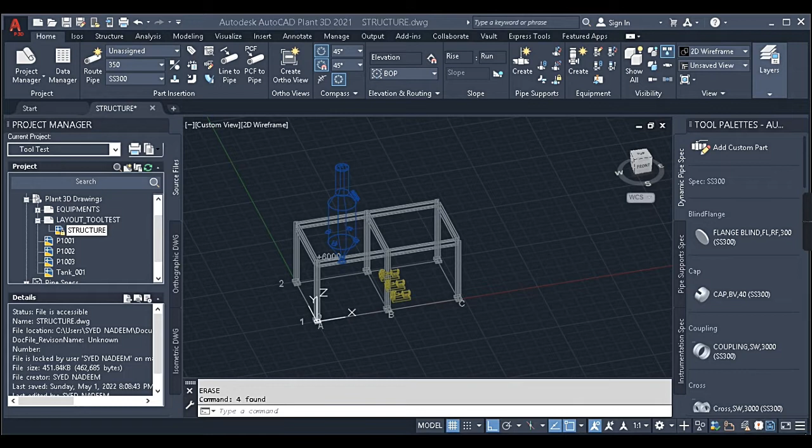This is the second part of our plant tutorial, and this tutorial is about clearing your tool test. If you haven't watched the first part of our plant tutorial, please complete the first part and then you can join the second part. So let's get this video started.

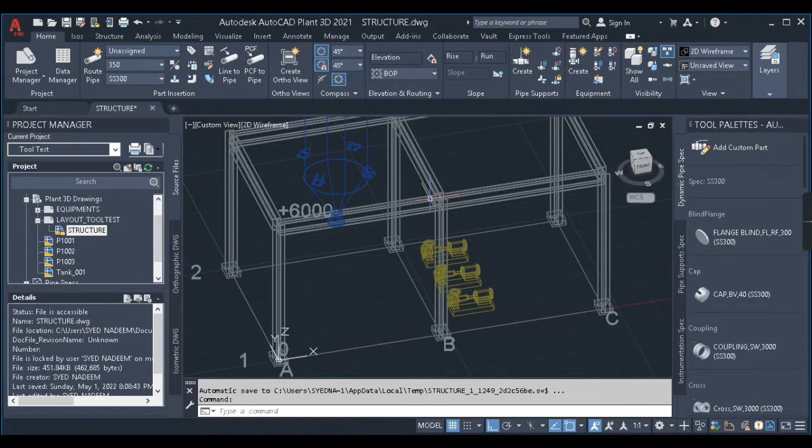So guys, this is the model which we had created in our first part. Here we have the equipment, the three pumps and the structure. We have to do the pipe routing for these three pumps which is getting connected to this suction line. We will be just modeling the suction line and not the outlet, as this is just an overview of our Plant 3D tutorial. In future videos we'll be getting into details of the pipe routing.

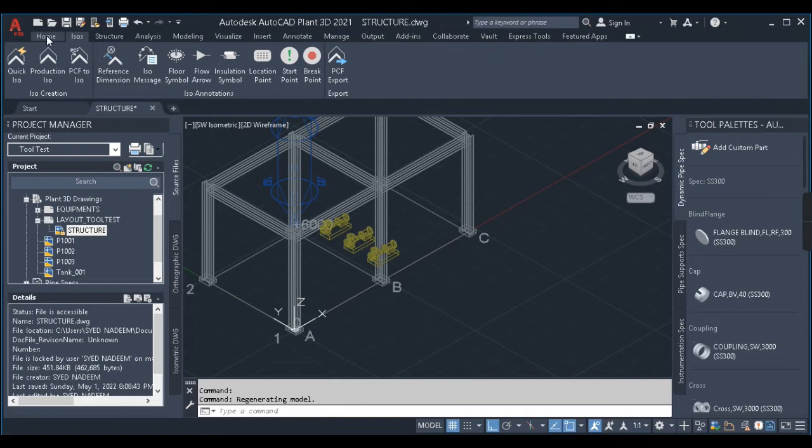So first, to route the pipe, we have to go into Home, and we have options like pipe route. For pipe routing we deal only with this section, and this section is for equipment modeling, pipe support, etc. Next we'll be doing the isometric extraction, for which you have to go into the isos. So first let us get started with the pipe routing.

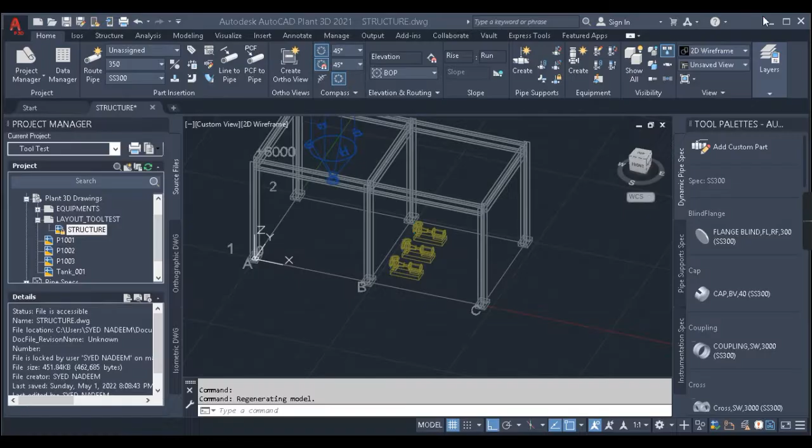I'll start with the suction of the pump. We have a 12-inch line here, and the pump suction nozzle is 10-inch. It started from the center of the pump, and as you can see, it is 10-inch. First I have to select the spec. As we don't have any specific spec specified for a project, I'll be selecting any random spec from here. I'll select this CS150. You can select any other spec, and if you're dealing with some company, they will have their own spec.

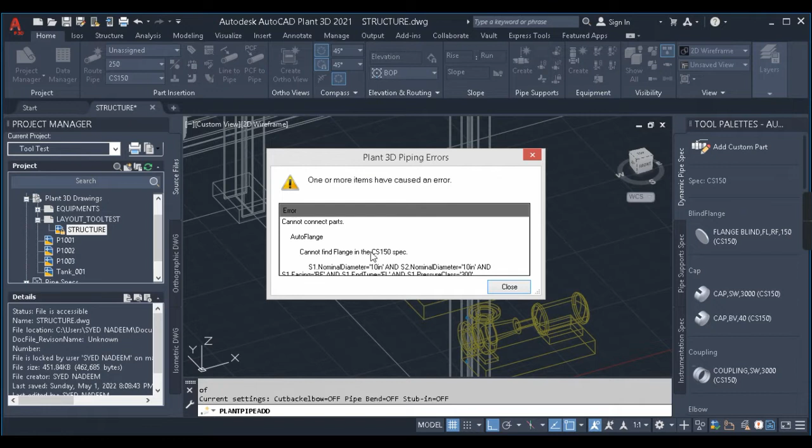So first it is 10-inch. 10-inch is 250, and I'll route the line. Route line, select nozzle. As you can see here, we are getting a message that it can't find the flange. So we don't have a flange of size 10-inch in this spec. So I'll change the spec to maybe SS150. Let me check with this.

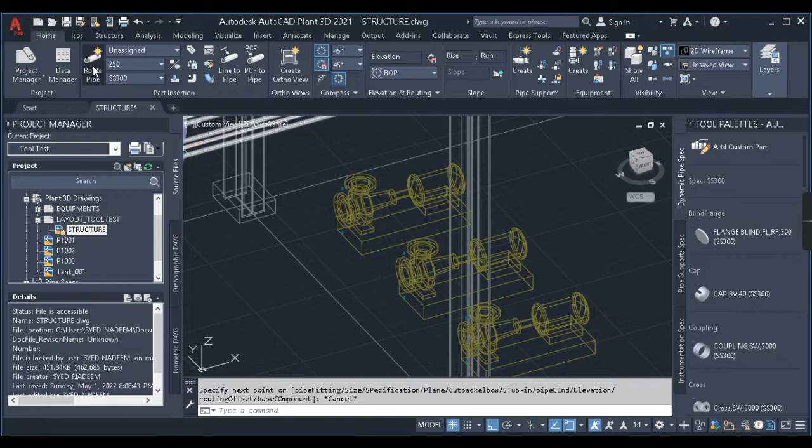So again, route line, nozzle. Okay, we don't have it in this as well. Let me just check this. Okay, the flange rating is 300. So 300 rating, nozzle. Yeah, now the flange is created.

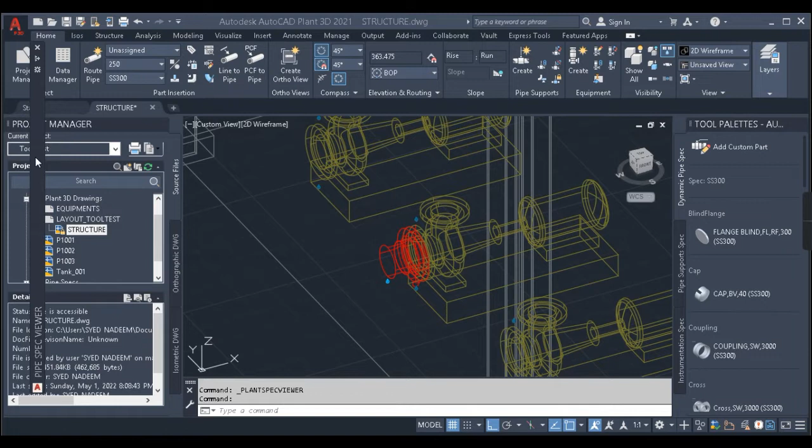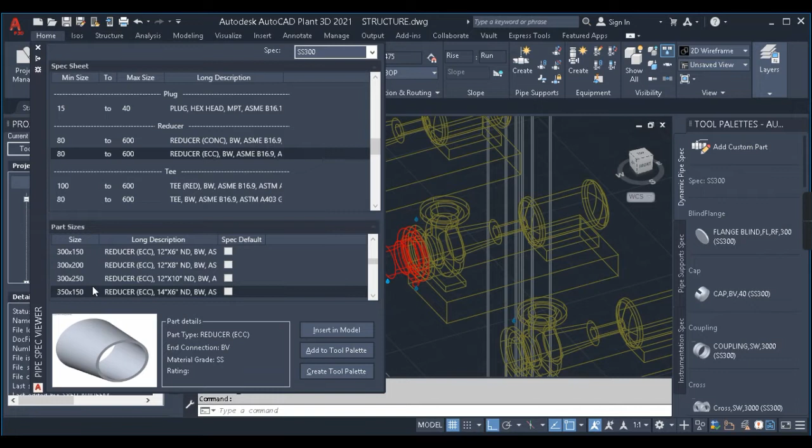250 by 300. I'll double click and it will come here, and I place it like this, and the flat side comes on the top side. Let me check. Yes, perfect. We'll route the line, and let's just give another 300.

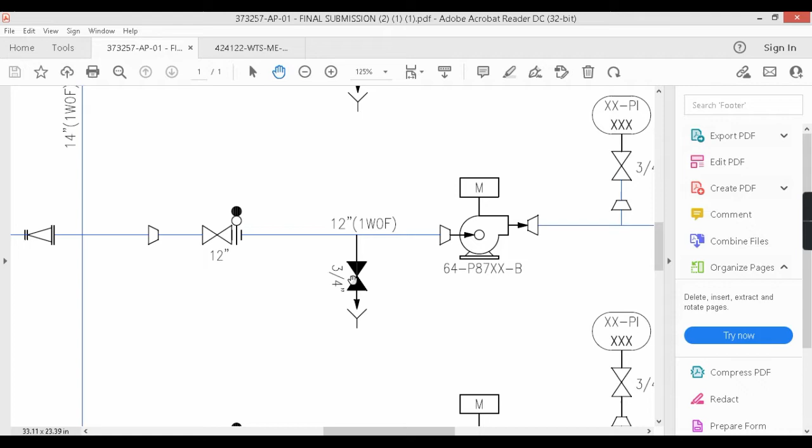Our next component which is coming is the drain. Let me just increase it to 500, and this length I have made as 500. In the center I'll be putting the drain. The drain size is 3/4 inch with a gate valve. So 3/4 inch is 20. I'll route from the center. I'll take around 500.

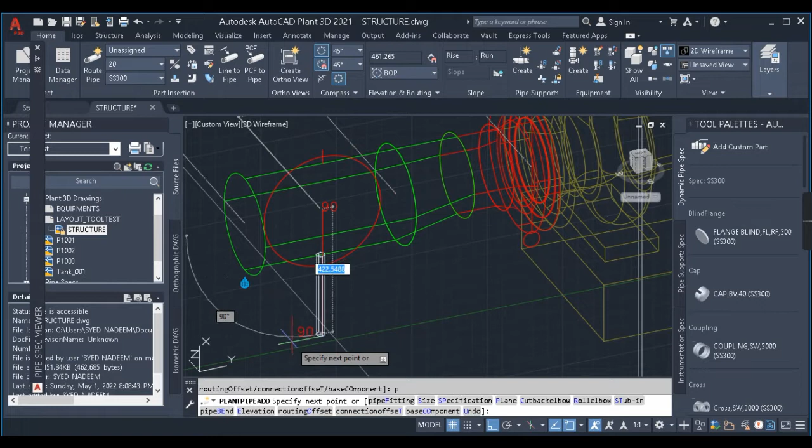Sorry, it has taken the vertical direction. To change the plane we have to press P and enter, so it will change the plane. I'll take 500. 500 looks too big, so let me just take around 350. Now I have to change the plane, so I press P. Another 200.

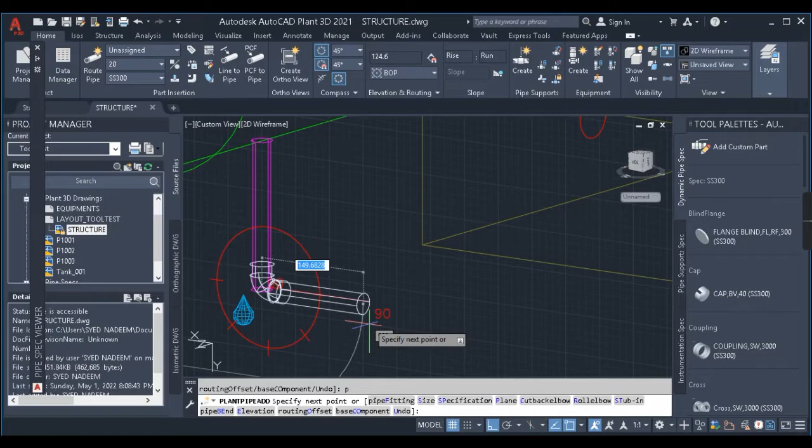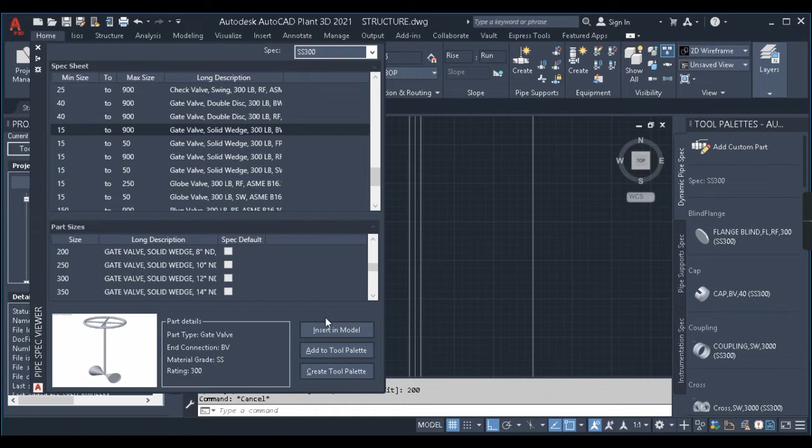Let me check in the top view. Okay, I have to increase this by 200. So I have a gate valve now. I'll just take this butt weld gate valve, insert in the model, and node, enter.

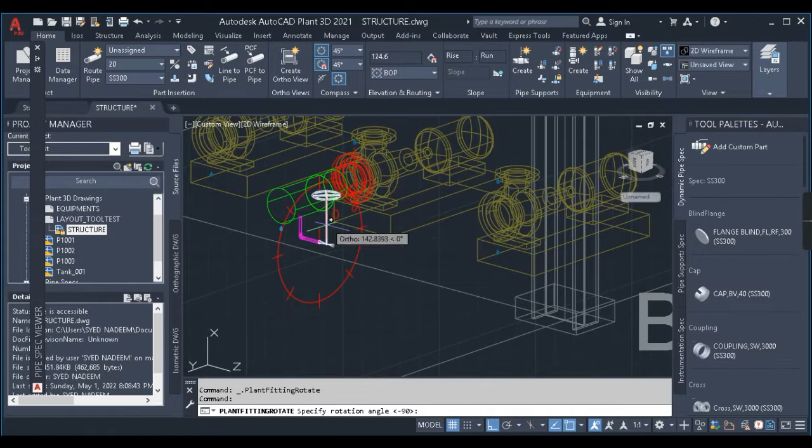Okay, and I have to rotate this valve by 90 degrees. So I have to click this valve, and we have a circular dot here, so that if you press it we get the rotate option. So you can select whichever direction you want the hand wheel to be.

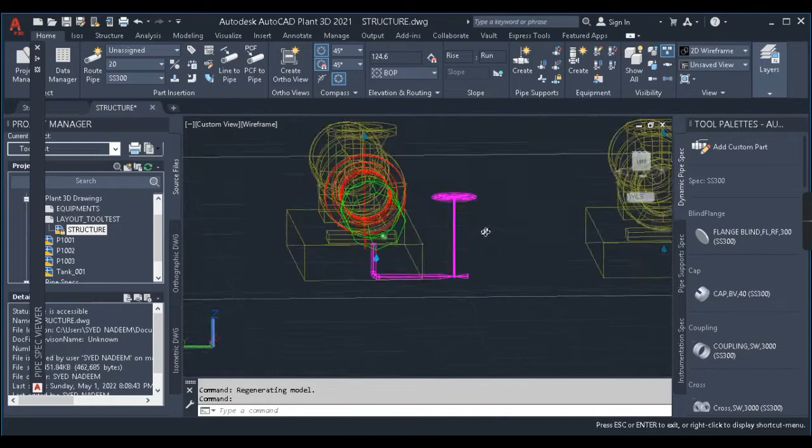Okay, and I have to move this valve by another 200. So I'll click this valve, press the center dot, I'll press 150. I think 150 is enough. Yes. So here we have our drain ready. So let me just route another 50 and change the plane by another 50. Yes. So this is our drain, and our drain is ready.

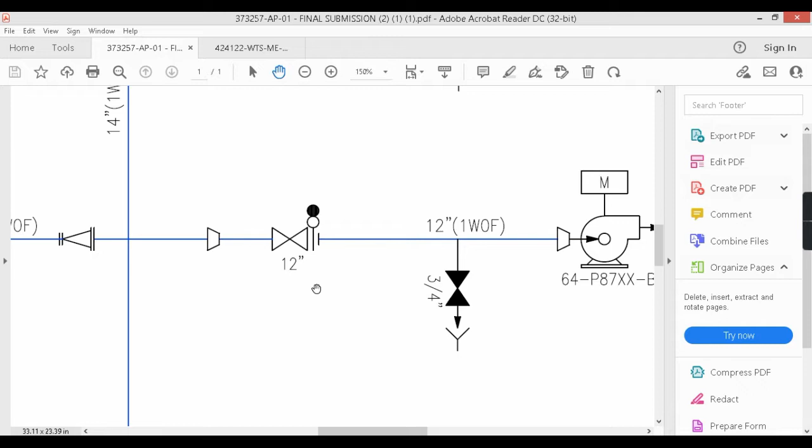So the next component we have in our line is a gate valve and a spectacle blind. I think we don't have a spectacle blind in our spec, so I'll just put a gate valve of size 12. Let me just select a gate valve from our spec, gate valve of size 12. I'll take this butt weld 300, insert in model.

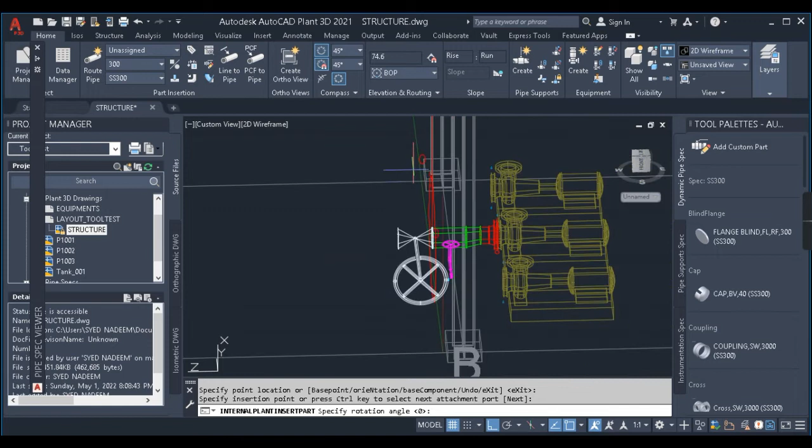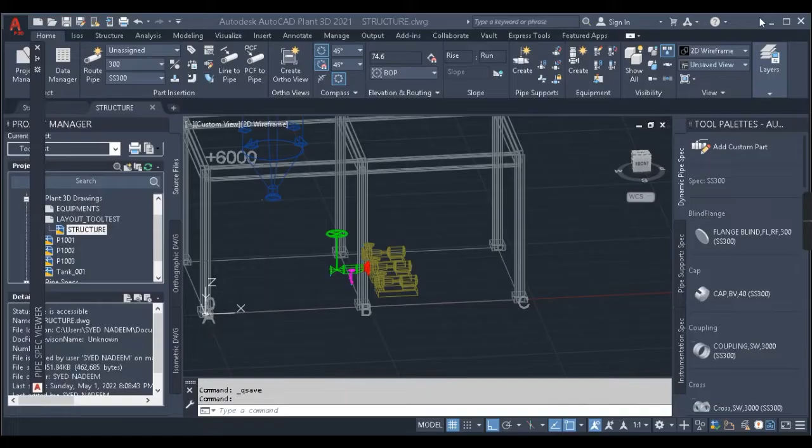So I'll just click here and select the direction in which I want the hand wheel. So here in this case I want it in the top direction. Yes, it's perfect. So save it. And the next component which we have is a reducer of size 12 by 14, and this is a concentric reducer. So I'll just put a spool of size 250, 1D here, and then we'll put the reducer.

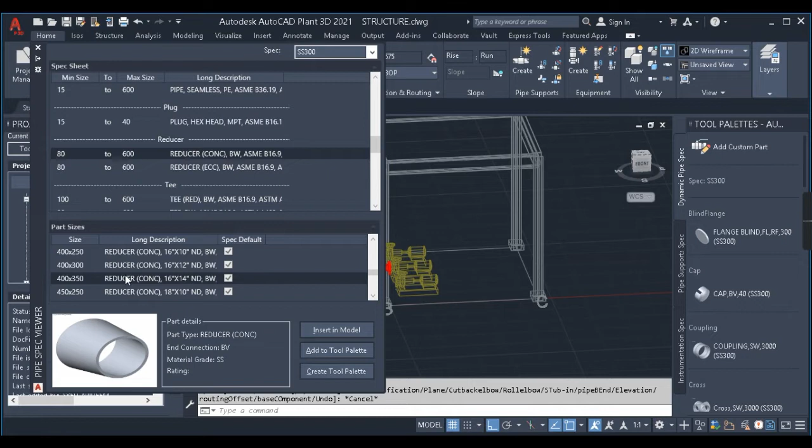Reducer is of size 300 by 350. So let me get into this reducer, a concentric 300 by 350. Okay, here we have the concentric reducer, insert in model. No, yes, and enter, and we have placed the reducer. Save it. And next the component which we have is an inline strainer.

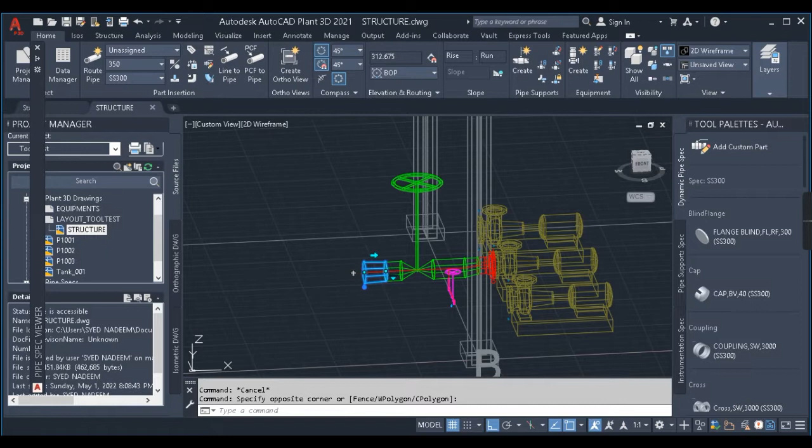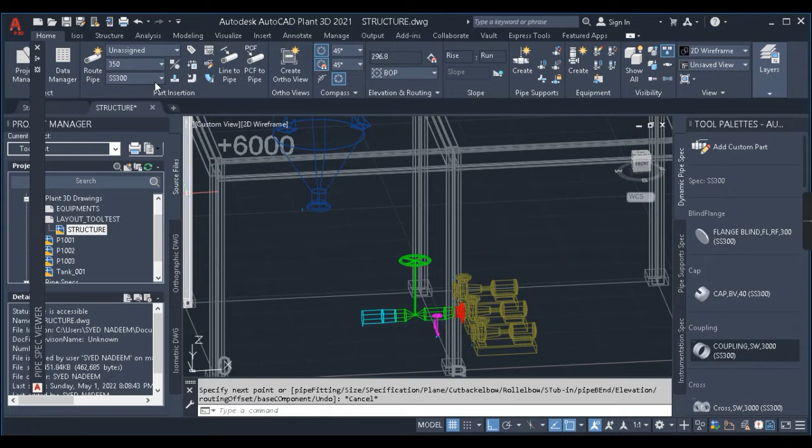And inline strainer, since we don't have it in our spec, I'll just place 2 flanges in this space. So I'll put around 1D of this, or maybe 250. Yes, I'll just place 2 flanges, so we will consider that as an inline strainer. 2 flanges of size 350. Else we can just pick the flanges from here. Weld neck flanges we'll place. Okay, we'll consider this as an inline strainer.

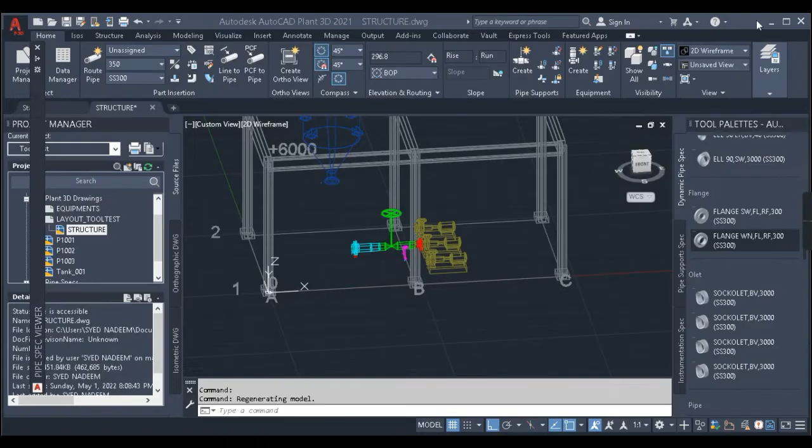Since we don't have many things in our standard spec here, we are just using it. But when you go to a company, you will definitely have all those components, so you have to place the respective components in that space. Okay, after the inline strainer, we have this 14-inch valve, which is connecting to the tank. So let me first route the pipe from the tank. We'll just directly connect to this node. We'll accept it.

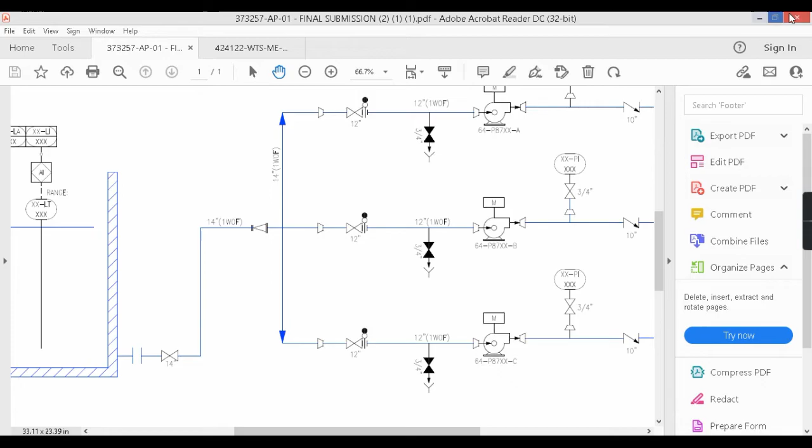Okay, and we'll place this valve here on this vertical line. So what type of valve is it? It is a gate valve of 14-inch size. So gate valve, we'll take this size 350, insert in model, and we'll just select a point somewhere in the line. As you can see, this valve's handles are very big, so it's okay for now.

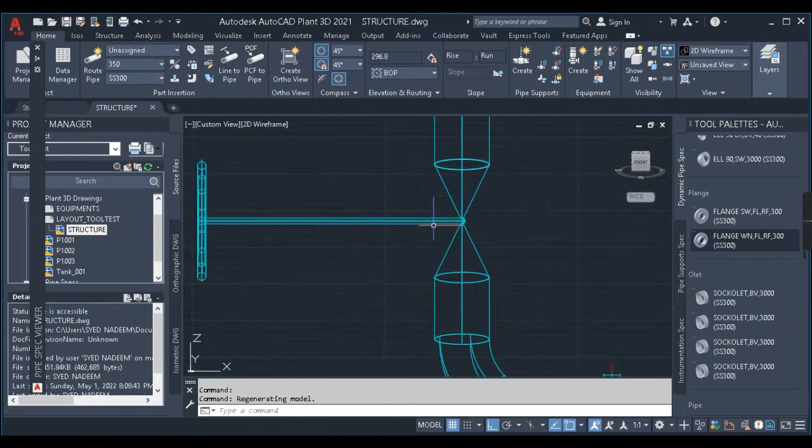So guys, as you can see, we have finished routing our main line. As you can see in this P&ID, we have the center main line connecting to the middle pump, and we have two other lines branching, and the same set of line gets copied to the other two pumps. So I'll skip these two lines. You can do it in your system if you want; you just have to place one tee and copy the same line to the other two pumps. So I'll be skipping that part.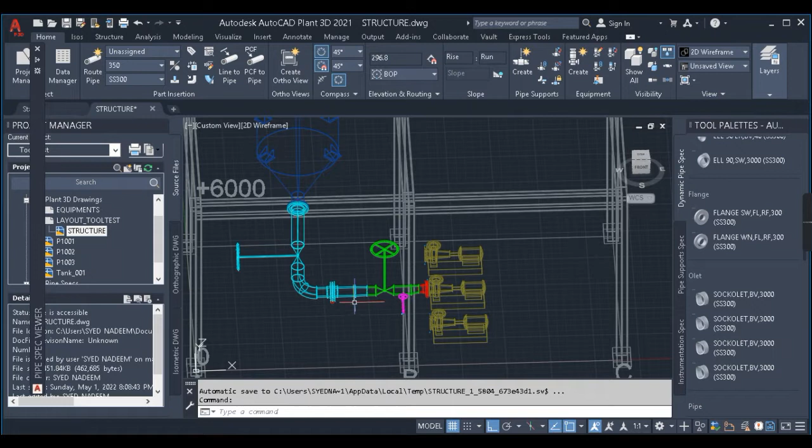So what I'll do now is we'll start with the isometric extraction. And before starting the isometric extraction, we have to give a line number to this line. For giving the line number, we have two methods. Either you can give the line number before routing the line, or you can just select this line. I'll click any component here, right click, add to selection. I'll select all connected parts, so the whole line gets selected.

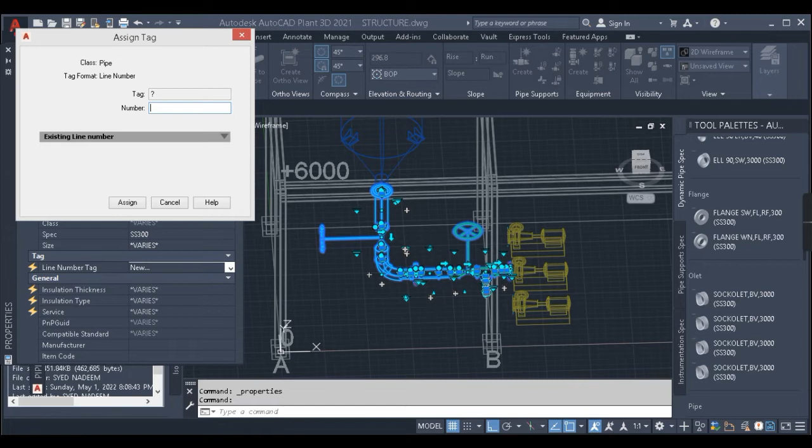So I'll open the properties and line number, and you can see here the line tag number. I'll expand this and press new. If I press new, I'll get the line tag. I'll just give L001 and assign, and as you can see, if I select any component, the line number shows up.

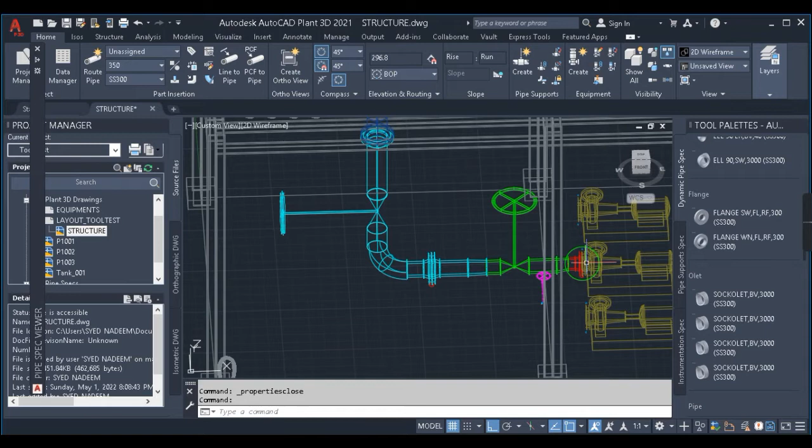So we have assigned the line number here. In the second method, you have to go here and click route new line. You have to give the line number and then start routing, and the line will automatically take the same line number. Okay guys, so let us now start with our isometric extraction.

So for the isometric extraction, first you have to click on this tab named isos. Here, if you click isos, you can see all the functions which are required for the isometric extraction. So here we have quick ISO, production ISO, which we'll be using, and we have breakpoint, start point, location point, insulation, and flow arrows.

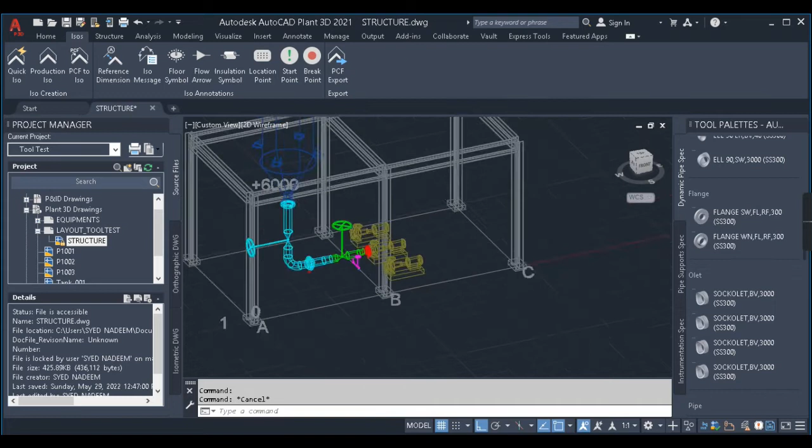So start point is used when you want to indicate that you want the ISO to start from some specific point. For example, I want the start point to be this discharge of this nozzle, so I'll press start point and select the end of the nozzle. So I have placed the start point here. So this is my start point. And next, breakpoint.

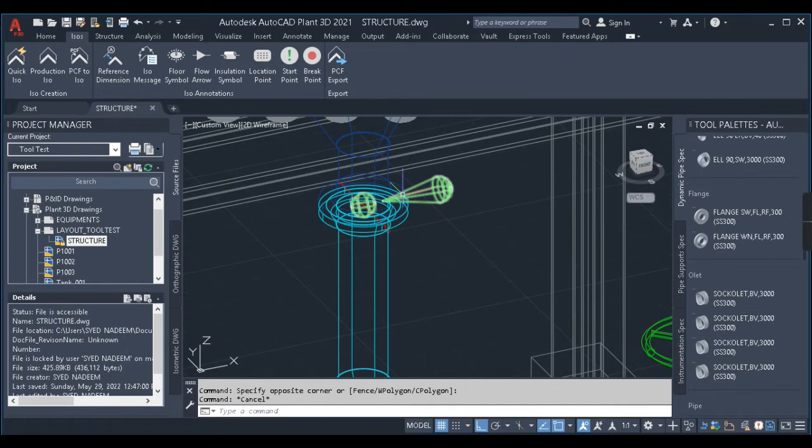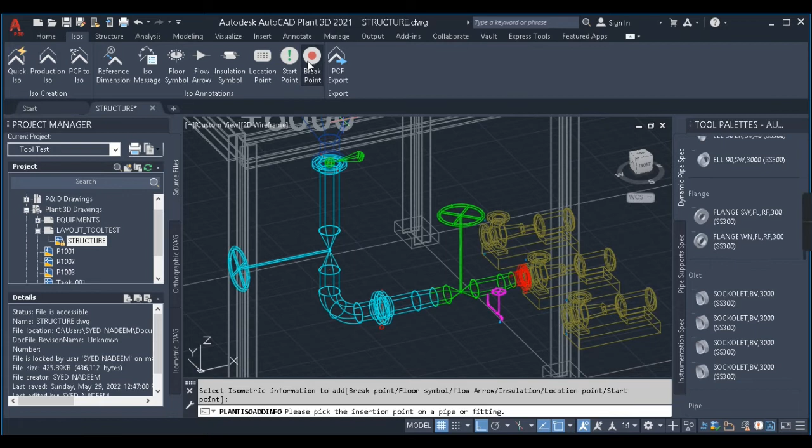Breakpoint is used when you want to break this full line into two spools. For example, I want this spool from this discharge nozzle till this end of the elbow in one sheet, and the rest of the spool in the other sheet. So what I'll do is I'll select this breakpoint and select the point where I want to break the spool. So this will be my breakpoint. Right now I don't want a breakpoint.

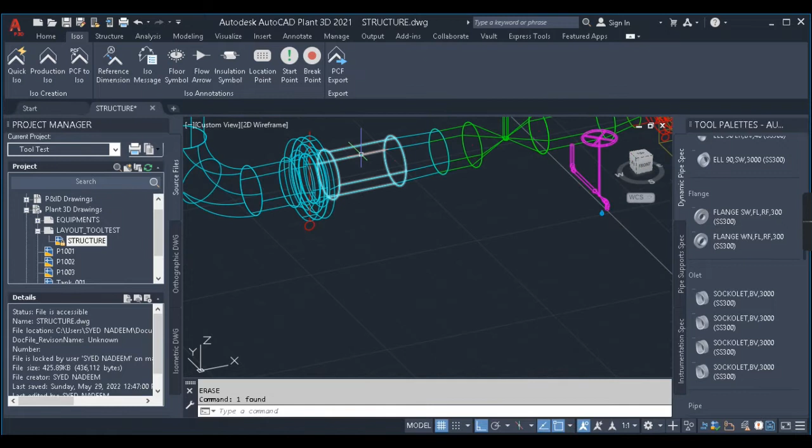Next, location point. Location point is used when you want to indicate the location of some point. Just select the location point and click the point where you want the location to show up in your isometric. Next, insulation symbol. If the line is insulated, you can show this insulation symbol.

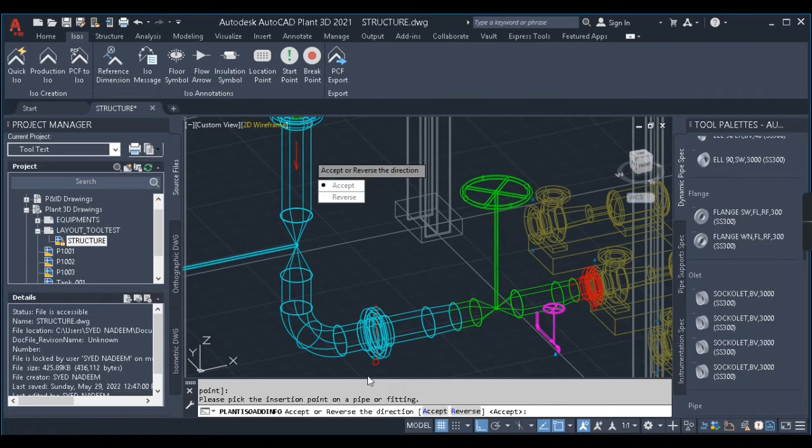Next, flow arrow. Flow arrow is to indicate the flow direction in the isometric sheet. Our flow is from the discharge of the nozzle to the suction of the pump. What I did is I selected this flow arrow and clicked on the line. It is asking to accept or reverse. Reverse will reverse the direction. I don't want that, so this direction is okay for me.

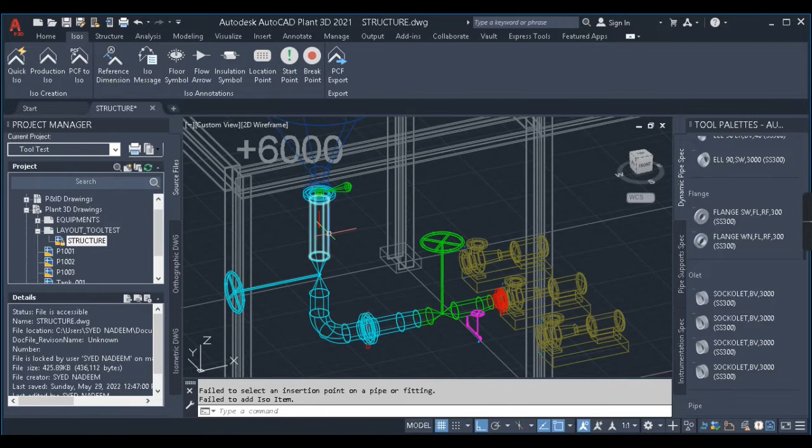Next, floor symbol. Floor symbol is used if a line is crossing the floor. In my case, it is not crossing the floor. If the line is crossing a floor, you just place a symbol on that floor level on that line. ISO message: if you have a specific message that has to be read on the ISO for that specific line, you can use this, type your message here and select where you want to display the message on the line.

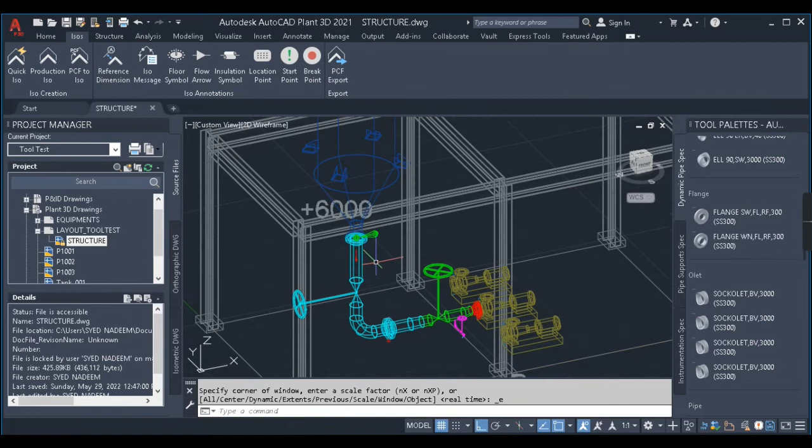Next, let us extract our ISO. First we'll do a production ISO. I'll click this production ISO, and if I have hundreds of lines, all the numbers are displayed here. As I have only one line, this L001 is displayed. I'll click this line, or whichever line number I want to extract the ISO for.

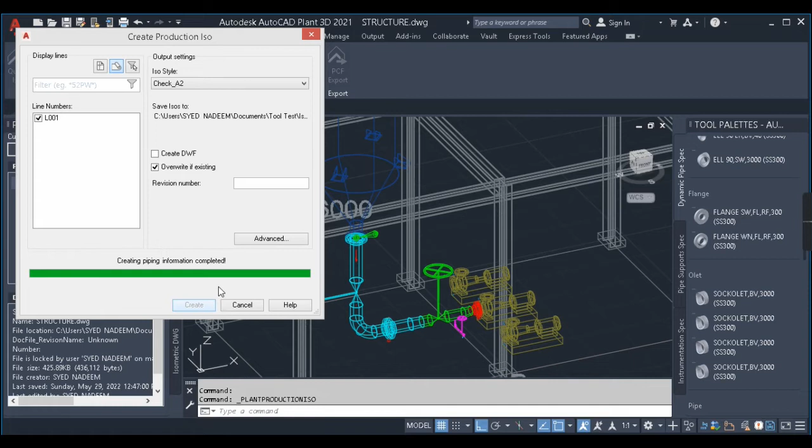I'll click this line and I won't change anything, except I'll check here as well to overwrite if existing. And this is the ISO style. You don't have to check anything apart from this. Just click the line, overwrite existing, and create. It will take some time depending upon the speed of your system to generate the ISOs.

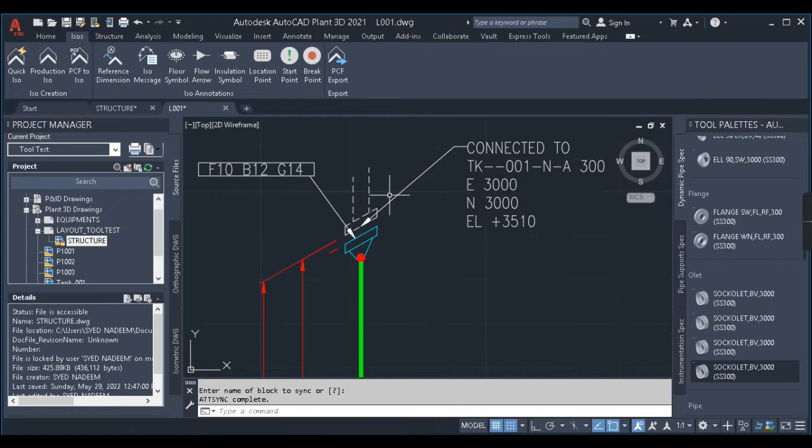As you can see, my ISO is ready. I'll click this message here, and we have the ISO location displayed. I'll click on this, and we can see the ISO is ready. This is the discharge nozzle of the tank connected to tank 001, and the line you can see. And this is the end section, and our isometric is ready. So this is how we extract the production ISO.

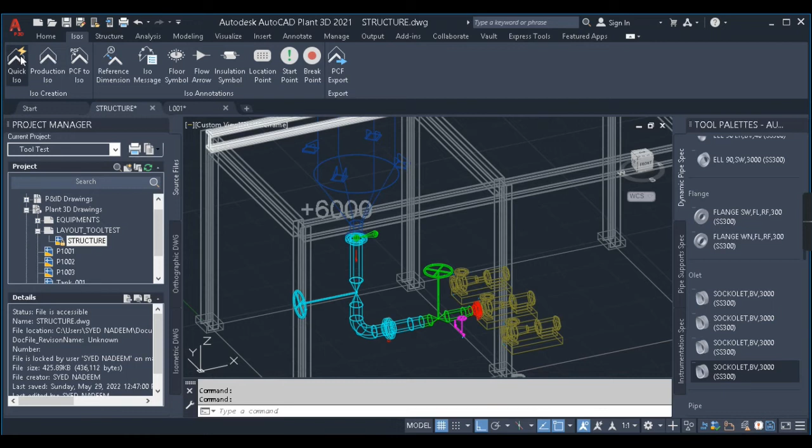Next we'll check the quick ISO. For example, I have routed this pipe and I want a quick review of that ISO. I'll click the quick ISO and select the parts which I want the ISO to be displayed for. For example, I want only till this end, so I'll press enter, check overwrite if existing and create. As you can see, my isometric is ready.

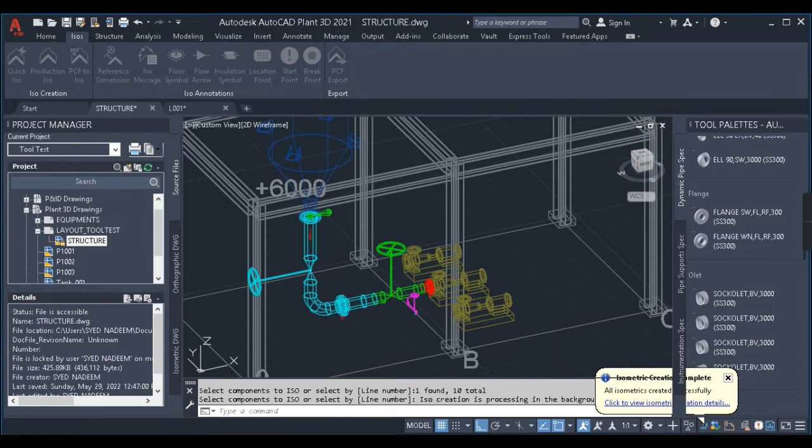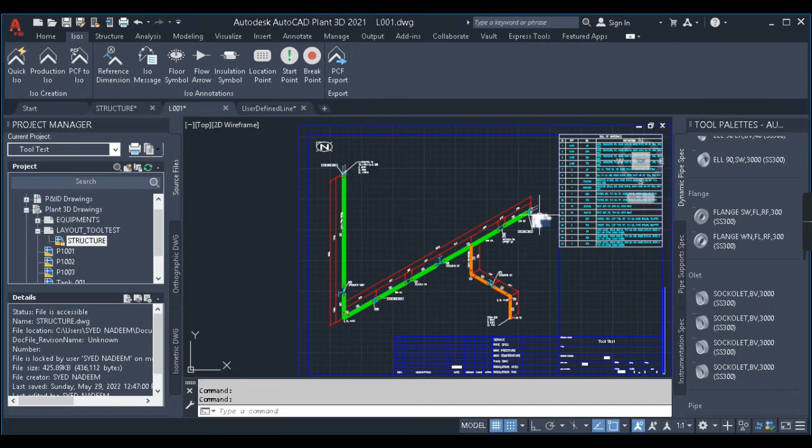I'll click this and done. As you can see, it has created the ISO of the selected part, from discharge till the end of the elbow. This isometric is just for reviewing purposes. So production ISO is used for manufacturing the spools, and quick ISO is just for reviewing. So this was all about the isometric extraction.

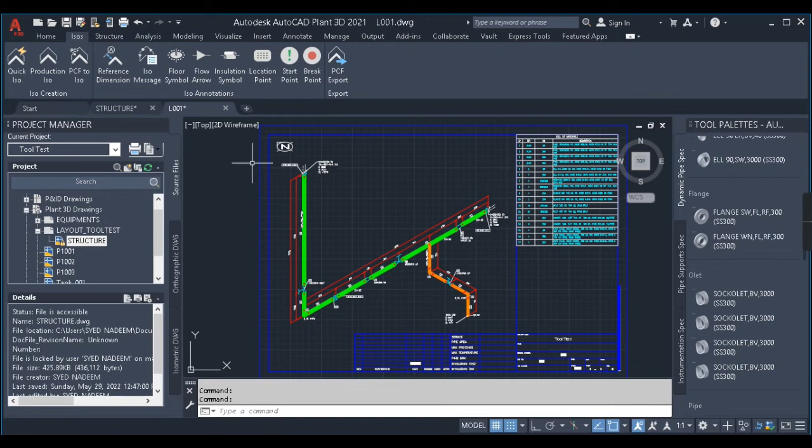Now let us have a brief look at the piping GA, creating the orthographic views of our piping system. Let us start the final part of this video, the piping GA extraction, that is the ortho views extraction. First we create a file. For creating the orthographic views, go here, click on the orthographic drawing tab, and here you have the orthographic drawings.

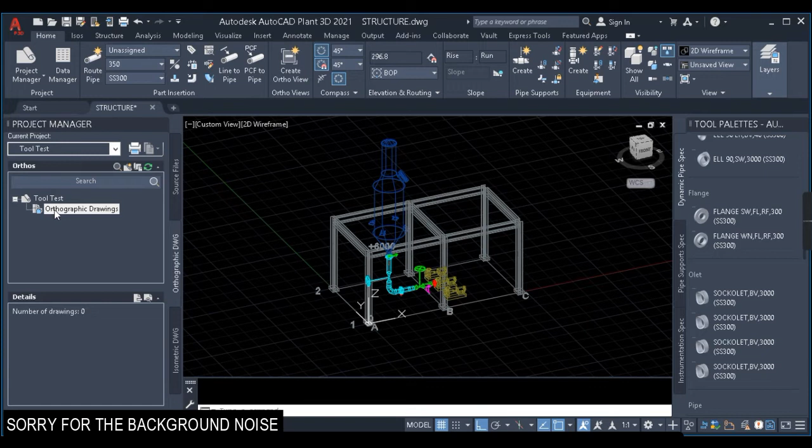Here just create a new file. I create tool test ortho. My file is created with the standard template. To create the orthographic views, we have some new commands in the ribbon bar now. I'll click on new view and select the file where I have done my piping, that is the structure. I'll click OK.

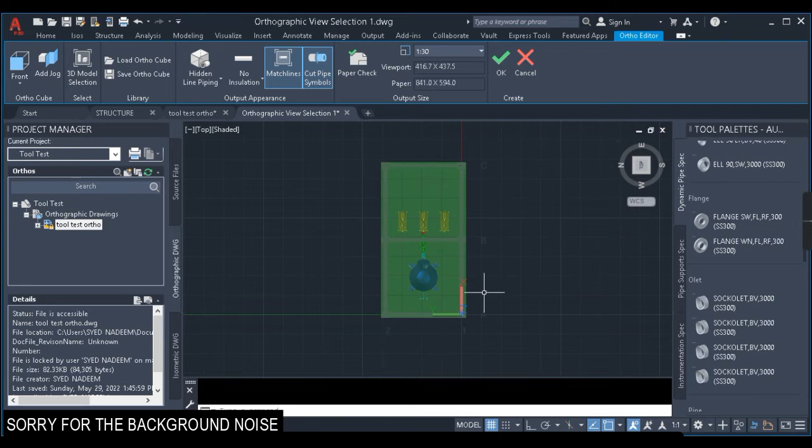And you can see we have a green box on our piping system. So whatever is present in this green box will be covered in our orthographic views. As you can see here on the top left side, we have front, top view, whichever view you want. For example, if I click on top view, the red color of the green box will go on the top. And if I want the front view and click on the front view, you can see the red part comes on the front side.

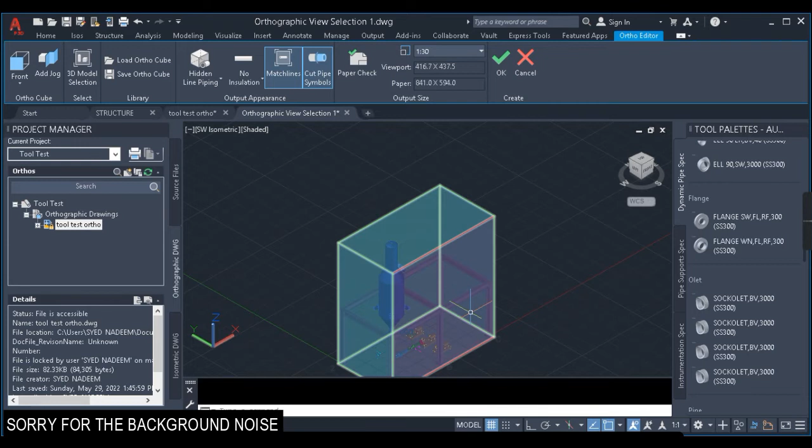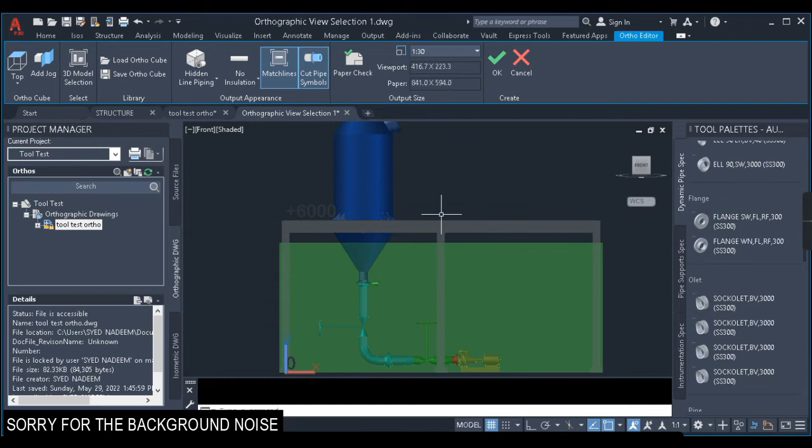So whichever is red and whatever you're seeing from that red side will be displayed on your orthographic drawing. Right now I want the top view. I'll click on top. So here it's on the top view, and also you can crop this view. For example, if you want the view only till this part, from the ground floor till below the 6 meter floor, I can just crop it. And here we have different options, like if you want the hidden lines and the hidden items to be shown, you can select hidden line piping. So for now I'll select the hidden line piping.

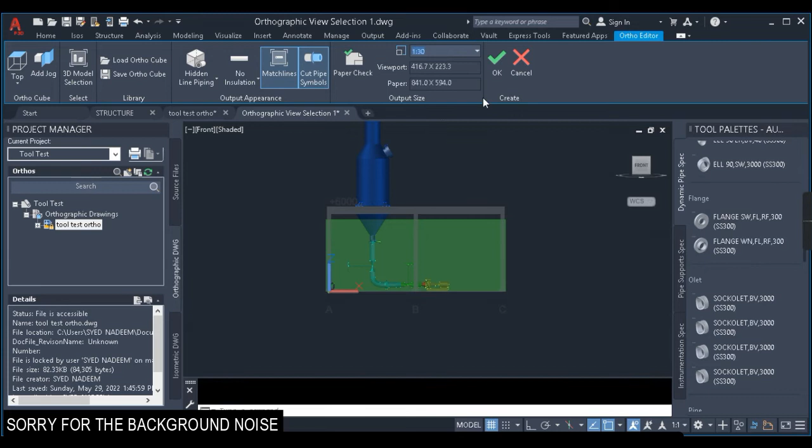If you want the hidden lines not to be shown, you can select no hidden lines, or show all hidden lines. It depends on whatever you want. I'll just click on hidden line piping, and I'll set the scale for my orthographic views. I'll take it as 1:30 and press OK. And when I come on the screen, I just have to select where I want to place the view. So I select randomly on this sheet, and my view is getting created, and it is done.

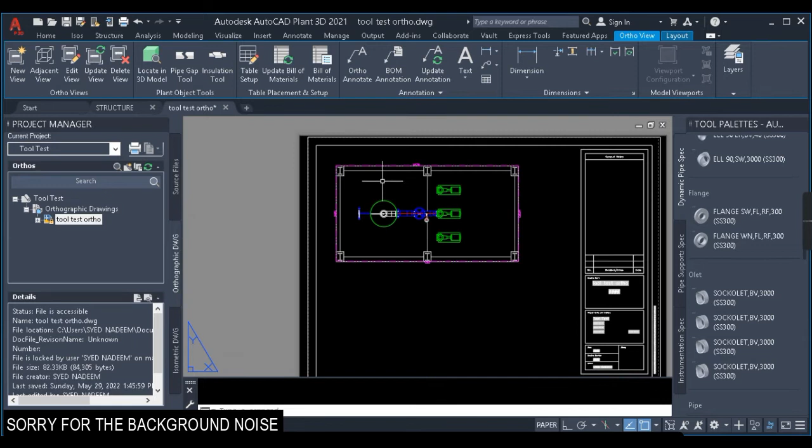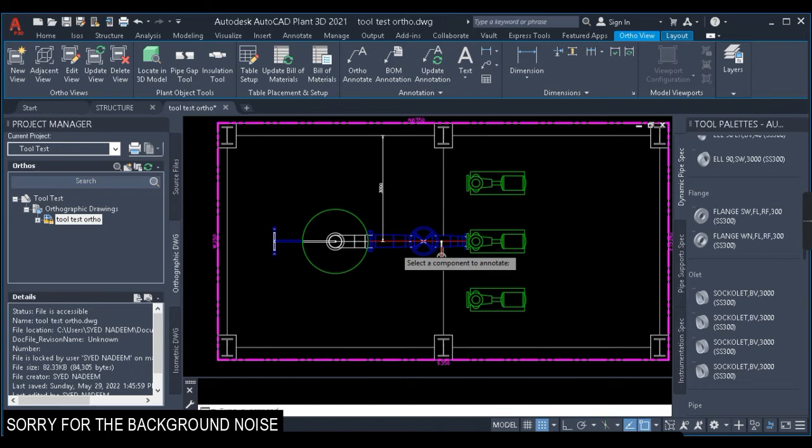As you can see, we have the 3 pumps, we have a tank here, and in this view you can give whatever details you want. For example, if you want to show the reference dimension from the axis, or if you want to show the line number, you can right click, go to Ortho Annotate, Piping, then you can see here line number call out, and select the line. You can see the line number is being called out. And next, if you want a full line number call out, you can select here, select the line, and you can see the size, line number, and the spec are being called out.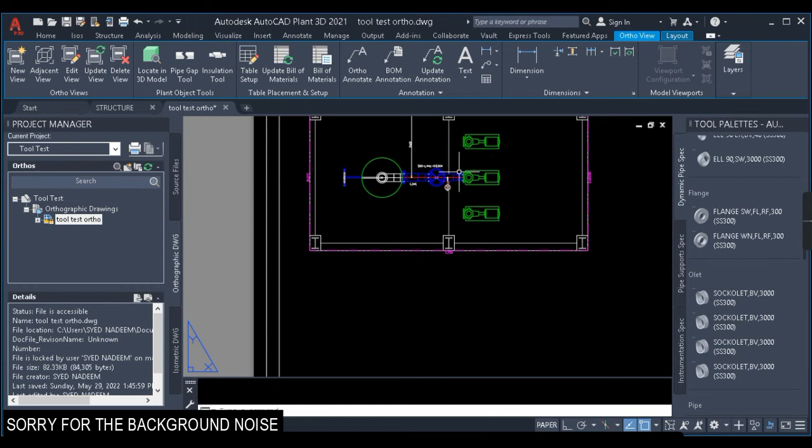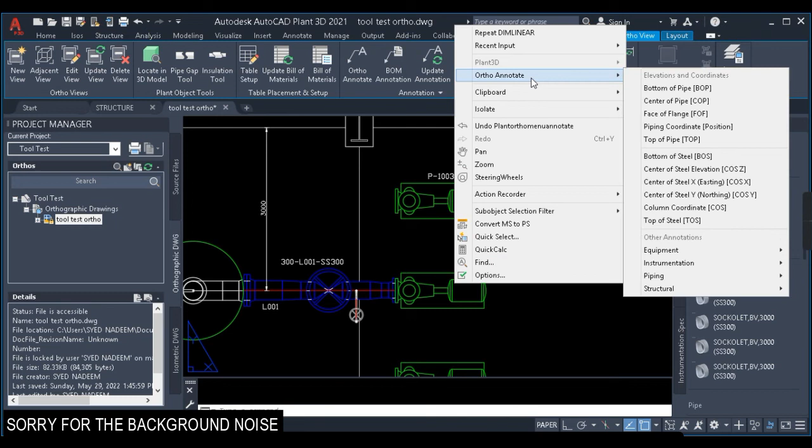And next, if you want to give the tag of these equipments, you can right click, Ortho Annotate, equipment and equipment tag. Click on the equipment and you'll get the tag P1003. Right click, Ortho Annotate, equipment tag, right click, Ortho Annotate, equipment tag. As you can see, this is how we can give the equipment tags.

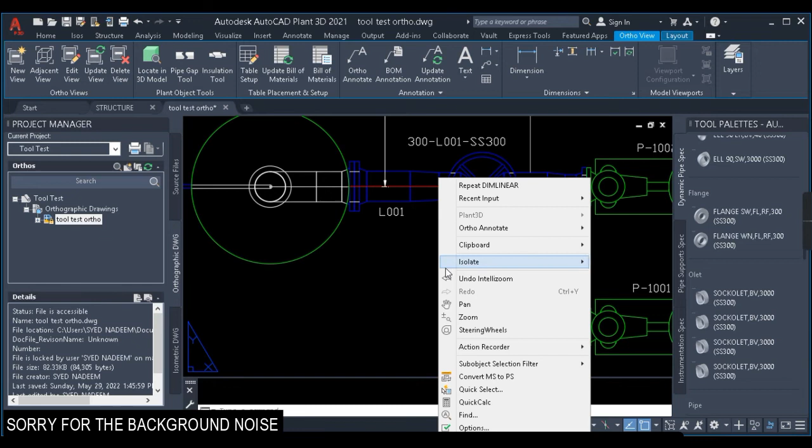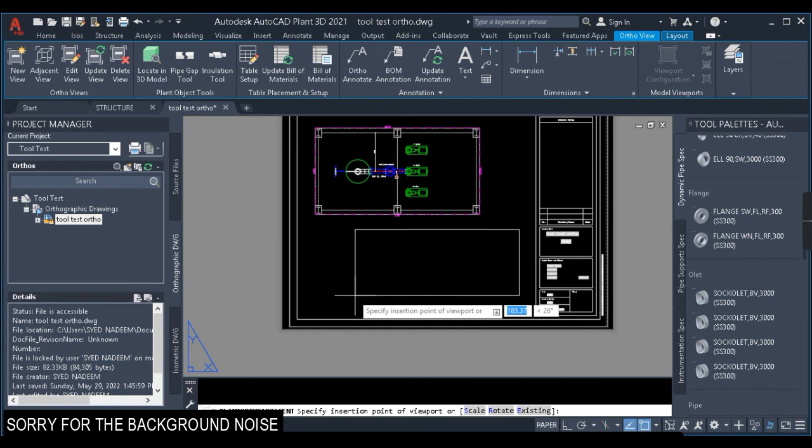Then if you want to give the bottom of the pipe, the distance of the BOP, you can right click, Ortho Annotate, BOP, select the pipe, and it will show you the BOP of that line. Place that. And next, if I want the front view, we have an option of adjacent view. I'll click on the adjacent view and select the current view, that is the top view which I have here. And next, whichever view I want, I'll just select that. For example, if I want the front view, I'll select the front view and just place it. See, we got the front view of the same item.

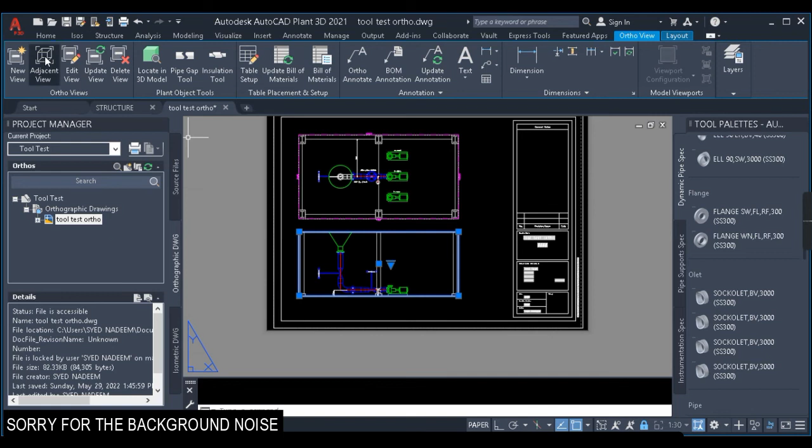So here also, if you want to give the distance from the center of the pipe to the bottom of the floor, you can give it, and whatever details you want, you can give here. And so guys, this is how we create the orthographic views of our piping system. And again, if you want an isometric view, you can just click adjacent view, then southwest probably. This is okay, and we don't have space in this, so I'll just place it outside. As you can see, this covers our isometric view.

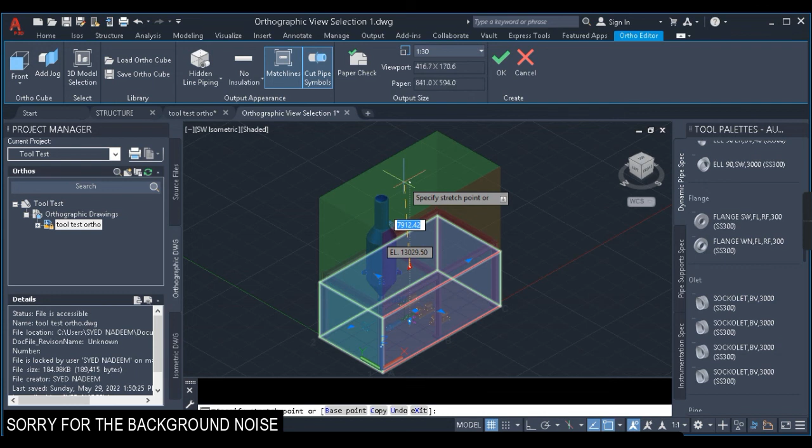So if you want to cover the whole plant, you can just go here, edit view, and just expand the box so that it covers the whole plant. And if you press OK, it will cover the whole piping system. So guys, this was a brief discussion about how you do pipe routing, isometric extraction, ortho generation, and everything basic which you require for clearing your tool test.